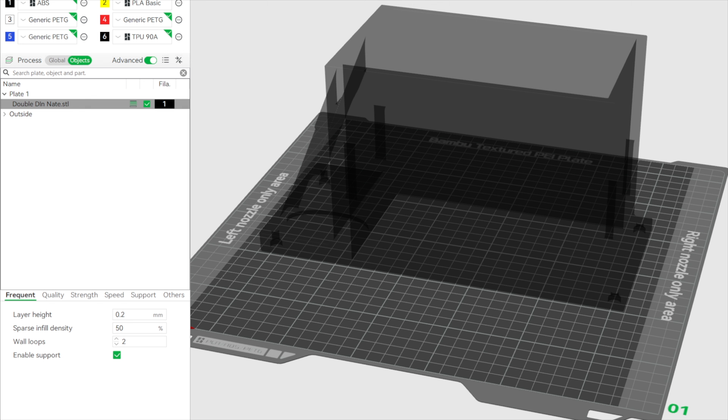So as you can see here, this is Bambu Slicer, which is a 3D print software. This was made for me by my buddy Cam, Overhead Cam, over on Instagram. He's rather Insta famous, is Cam. You might know him, but yeah, cool dude, good guy.

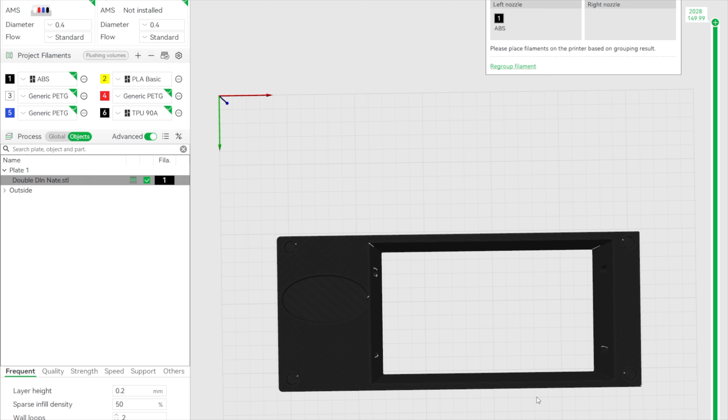So effectively, what we've got here is the plastic acting as the cage for the double-din unit, because you're making it from scratch, you can do whatever you want. So that's the aim here: the plastic box is going to be the cage.

The oval on the side will have the old Toyota Corolla logo embedded in it, and then underneath that logo I will drill a hole and potentially put the heater knob, or I'll just put the heater controls somewhere else in the car and keep that as a very clean center dash piece.

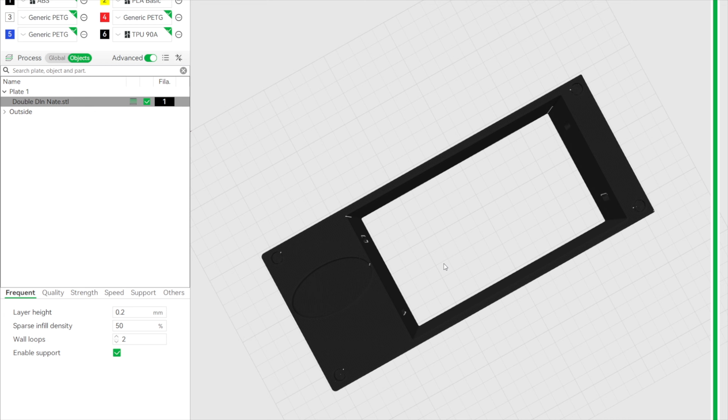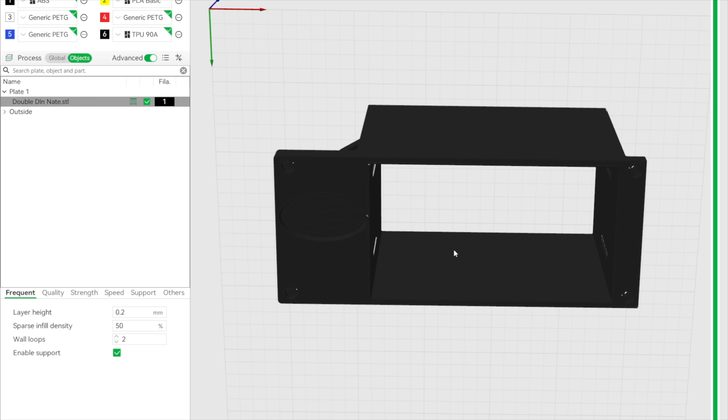So very happy with how this came out. Cam CAD'd this up for me in, I don't know, it must have been about an hour, if that. It took no time at all, did it literally in front of my eyes. There's some supports on the side, and yeah, it's not bad. This is again just a prototype - we measured and did lots and lots of measurements, but this is literally just a prototype. So yeah, I'm gonna print it out and go on from there, basically.

Alright, so like I said, this was a prototype. And this is the head unit, which is actually in my Datsun. I've just taken it out to put it in here and take a look, basically, see how it's fitting. It's not too bad. Obviously, we have, if you can see in there, pretty major gappage behind it.

And that's because behind here there are some kind of bolts that seem to be sticking down quite a lot, actually. You can see where it's hitting there on the bottom and then there on the top. So we might be able to trim this down, or alternatively we can literally just reprint this but move some of these things out the way. So shrink the back down, because it actually doesn't need to be as big as that.

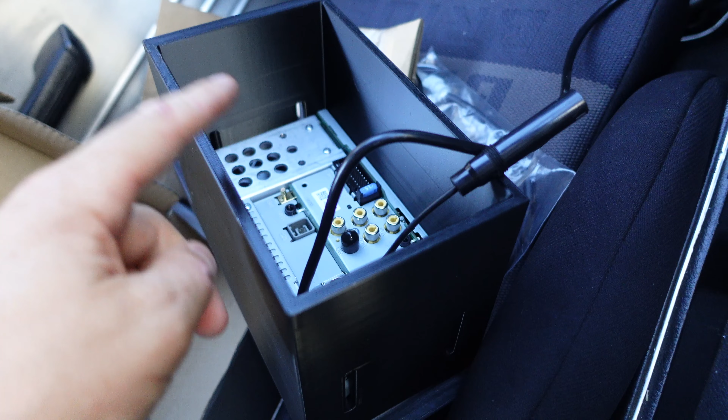The dimensions are huge by comparison to the double-din head unit itself. This is a low profile one, so we can adjust that and change that. And we'll have to print out another one, obviously. I think that'll end up fixing a lot of our issues here.

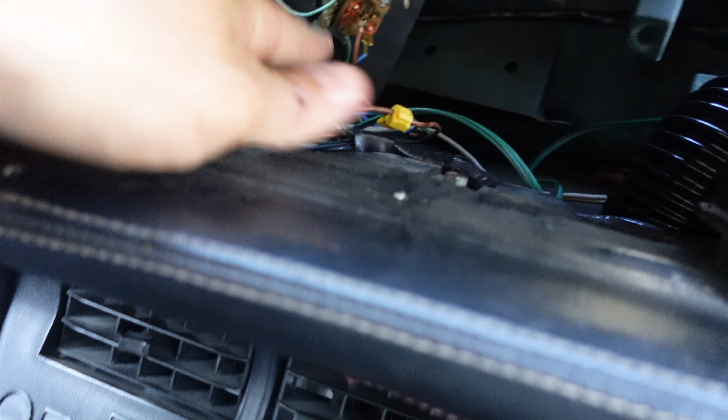The other issue is this bolt that is sticking down. Actually, I don't know if you can see that - there's a bolt that's sticking down here, which seems to be for the actual dash itself. So that kind of has to stay there, annoyingly. Yeah, I think it is for the dash itself.

So we're getting close to this being a workable prototype, basically. Quite close, actually. Now this will need to be printed again, mainly because the idea behind this was to use this dash piece as the cage, right? Which we've achieved - we have achieved it, but it's too tight.

Yeah, it is ever so slightly too tight, which isn't a bad thing, I'm sure... anyway, rude joke out of the way.

So basically we need to change this ever so slightly, make it ever so slightly bigger, make that ever so slightly smaller. This is where the Corolla logo is going to go. And down the bottom, I'm going to drill another hole so we can have the heating control here as well. Or I may even just relocate the heating control to there, which was always the plan.

Anyway, but this does need to be adjusted and changed. So we're not quite there yet, but we're getting really close to getting it finished. I actually think all we'll need to do is shrink this back down and open this up. I mean, we're literally, because it's so snug, and we don't need it to be as snug as it is, because we've got these mounting screws on the side as well, which you can't even use because we can't even get it in that far because it is too tight.